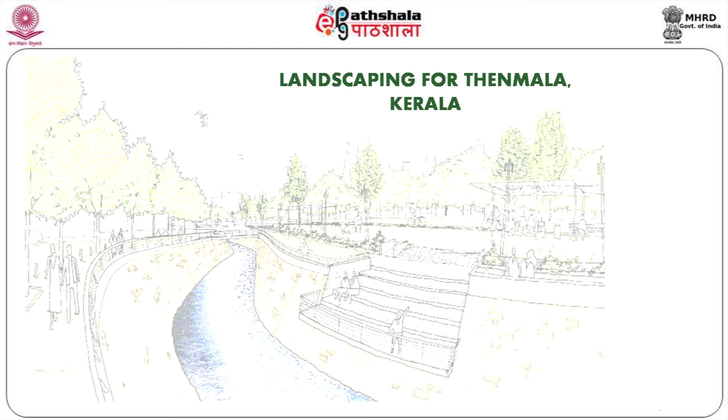So here today we are going to talk about Thenmala, which is further down of Thiruvananthapuram in Kerala. It's a beautiful setting area where the land actually belongs to the forest department.

We already have some kind of adventure sports parks available, and then some eco parks are available. We have one of the best tree walking facilities available - people can walk on the tree. You have a platform on the higher level where people can walk along the tree level, and you go almost to a height of 60 or 70 feet and see the canopy for yourself. You don't have to be a monkey to climb the tree to understand what is there, but you have a nice walkway and experience it as tree walking.

This particular area is also very famous for some kind of fishes available here, and this dam is a huge dam with very good water potential.

River rafting and a lot of sports activities are happening here. Considering all this activity, we need to develop this dam as one of the major breathing spaces for the people, so you can watch the river, write a poem, read a book, or do anything in the natural setting, which is more important.

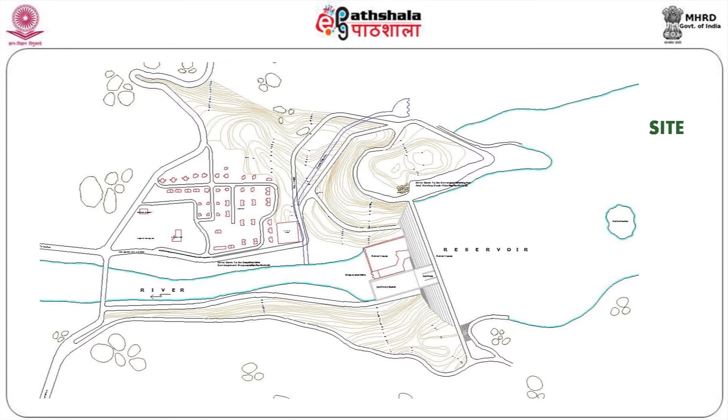Thenmala Dam it is - you have a mountainy terrain. Any dam is constructed on a higher plane. The river is flowing from uphill to downhill, so you have to choose between the mountain two areas and construct a wall across so that you can store the water.

So basically the design idea is developed in such a way - we have a lot of activity-based landscaping, and some cottages are proposed at the higher level, so people can view from the top area to the bottom area, and they can also enjoy the nature and stay there.

A lot of walking vantage points are created with the trees and other things. Mostly trees - we want to create a biodiversity here, so different varieties of trees are being planted here, so that when a person comes here they will see a totally different landscape altogether.

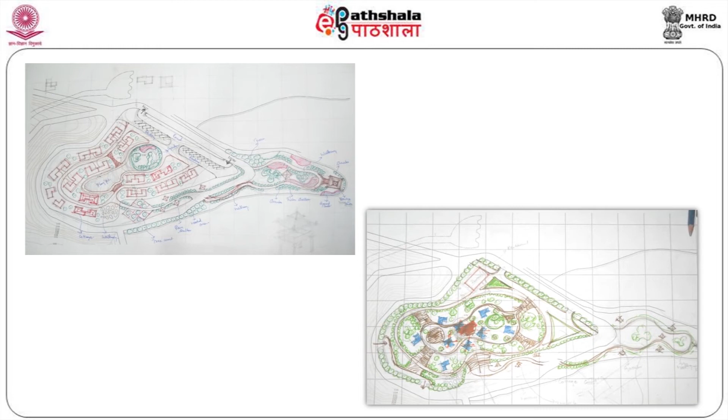These are all the sketches, handmade sketches which we are showing, ultimately converted into the working drawings. Yeah, this is the overall working drawing here.

The upper level is on the right side, then lower level connecting walkways - at different levels people get down, and you don't get down continuously, you get down in a slow pattern with gazebos in between, and people can climb down slowly, come to the lower area, and you have a motorable track to go to the upper level. You have parking facilities also on the upper level, and a walking promenade along the river with a boat jetty facility, check dam and water storage area available at the lower level, because upper level water is being used mainly for irrigation purposes.

This cannot be allowed to be spoiled by tourists - drinking water purpose and then irrigation purpose. Even the lower level is also not allowed to be polluted. In this area we have control over the pollution.

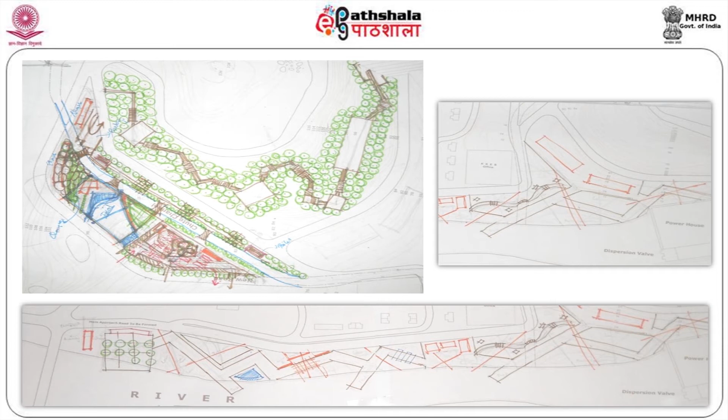So you can see the master plan yourself. Then cottages, play area, suites, parking areas, all the facilities that are required, this area has been provided.

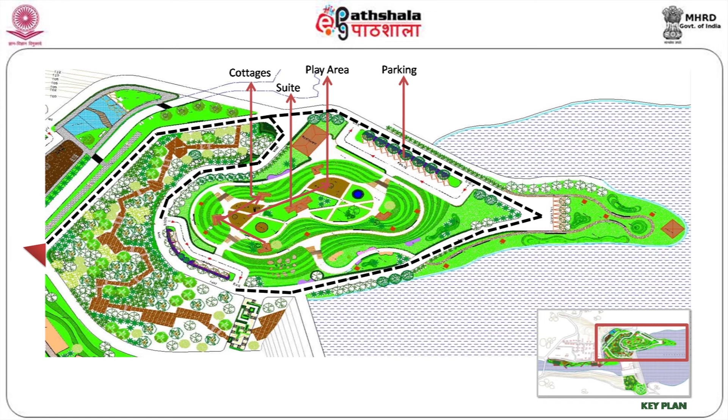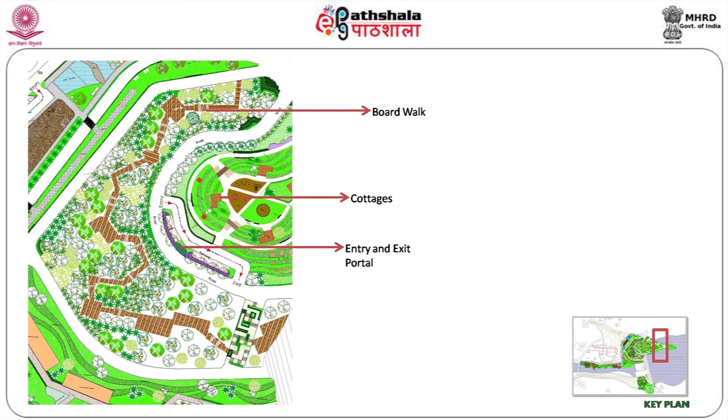Then entry and exit portals are created, cottages are there, and there's an excellent boardwalk available. Then there's a small security room, swimming pools are provided, some fountains are there in the rock and it can act as a waterfall for people to enjoy.

These areas, what is very important is you have to create an activity for the people. What kind of activity you are creating? What is different from other places? When we talk about Malampuzha Dam, we have fountains and other things, there's a swimming pool. Here swimming pool is there with a waterfall. But both are far away from each place.

Malampuzha catered to north Kerala because it's located in the central area, near the Palakkad or Coimbatore connecting area. This is down south where it's connected to Trivandrum, Kanyakumari, and Kollam area. So it caters to a different population, and what is required for them is also equally important.

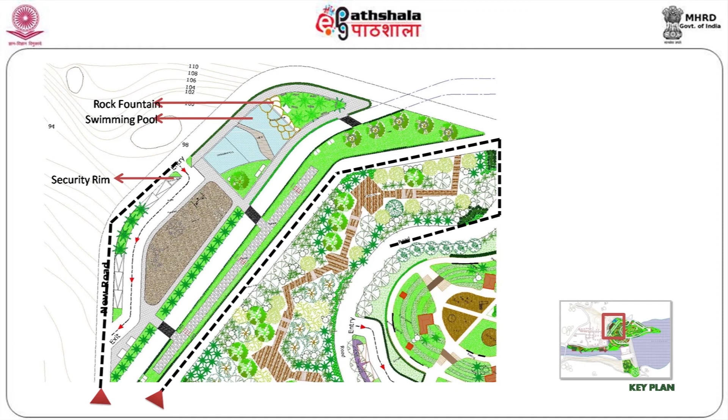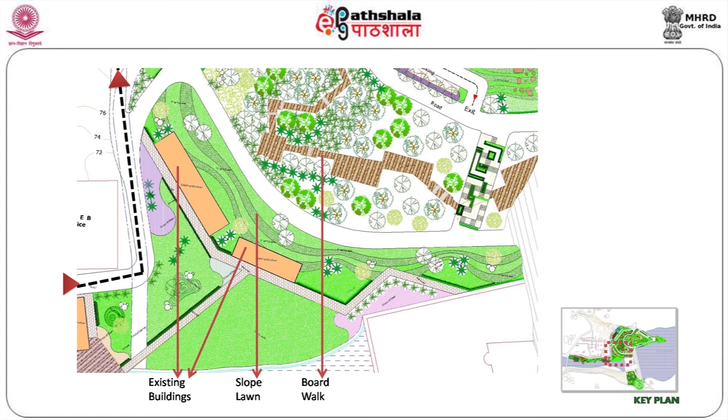Existing buildings need to be converted to some kind of activity, can be converted into a restaurant or maybe converted into some kind of selling area, things like that. Then you need to control the soil erosion by having a slope lawn.

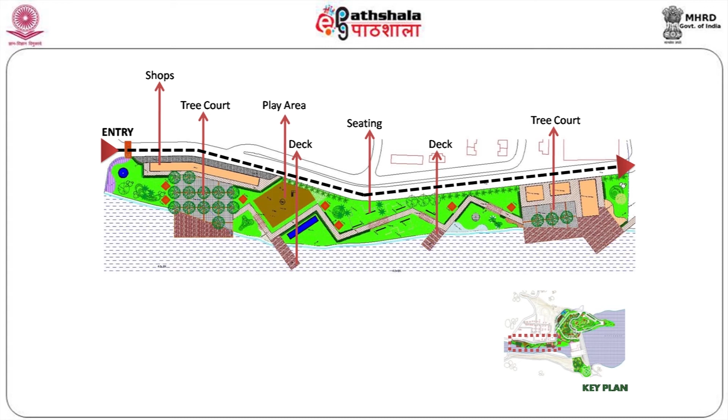Then you have a central fountain. Then you have earthy mounds there. Sloping lawns are created on the upper deck.

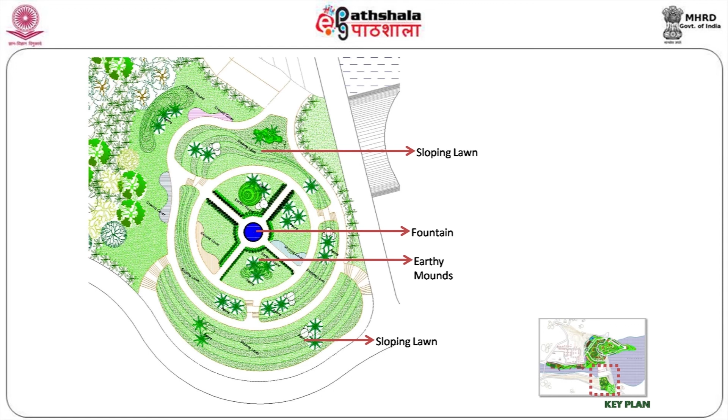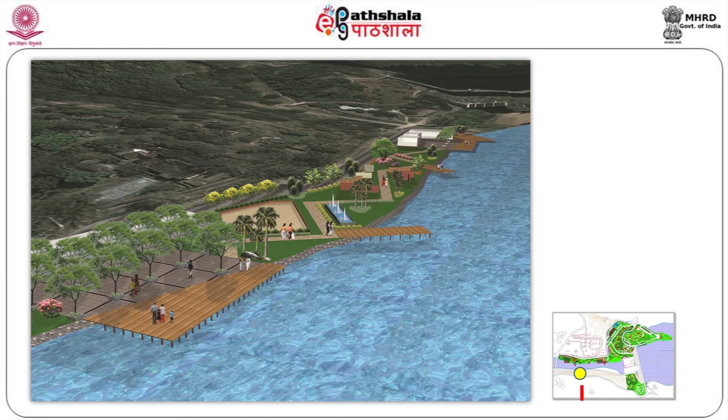Then you have different views there. This is the overall picture, how you conceive the idea, how you execute the idea. Once you provide all these kinds of facilities, people will really use these kinds of places.

What is more important is people come here from the city with a lot of pollution and other things. They come here for relaxation, to enjoy the place. Different fountains are there, walk-into bridges, decks, large walkways, tree courts, colorful plants, and aroma plants are there.

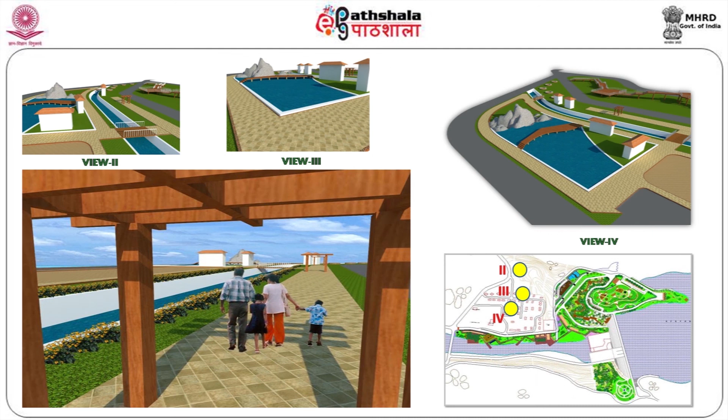And water is flowing - more so, anything with water, when there's a lot of water flowing, it really improves the microclimate, calms down your brain and your anger, the high temperature in the body comes down, and you feel very happy over a period of time.

When we had an experience of going in a boat in Alappuzha backwaters, after 15 minutes in the boat you really calm down and enjoy the surroundings. You stop talking on the phone, you stop talking to others, you just watch and enjoy the chill breeze. That is more important for you.

So these are all the views of the pergolas, views of the decks, swimming pools, walkways. As I was telling earlier, we were discussing in detail about the design elements of different items located in Thenmala.

The major thrust is on open space development, using the slope to advantage to create different steps to land up and different level points to cater to different activities, and how people will come down using the contour properly and then go up or down to different locations.

You also need to take care of your cut and fill, so that you don't cut more and you don't fill more. These kinds of technical details are very important when designing in a hilly terrain like this. After solving all those issues, you will come to a conclusion wherein this particular dam will ultimately become a very good tourist destination and a breakaway point for the public.